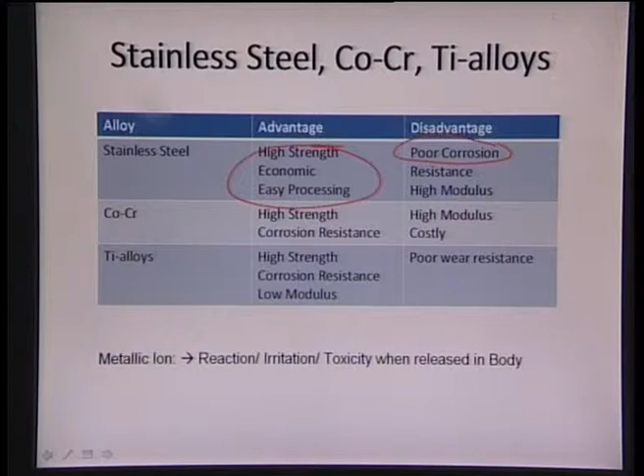So that's the reason we went on to the cobalt chromium alloys, and there we realized that it has very good strength and high corrosion resistance, but the problem is it is very costly and still has a very high modulus. If a material has very high modulus, then essentially the bone will start thinking, I don't need to be here, and then it will start getting reabsorbed into the body. So that is the reason we want to come back to a material which has a somewhat lower modulus, and that is being satisfied by titanium alloys. They provide a good combination of high strength, good corrosion resistance, and low modulus.

But the only problem with titanium alloys is that they have very poor wear resistance. So to counteract the poor wear resistance, titanium alloys generally need to be supplied with some sort of surface coating. Surface coatings take care of the wear part, so they enhance the surface wear resistance of the titanium implant. At the same time, we can also apply a coating which is much more biocompatible in nature, and which can assist bone integration onto its surface.

That coating can be more ceramic in nature, such as hydroxyapatite. Once the hydroxyapatite-based ceramic coating is applied onto the titanium implant, it can take care of the lower wear resistance of titanium, and it can impart much superior wear properties. Also, it can provide a base for cells to grow, adhere and proliferate on the implant surface.

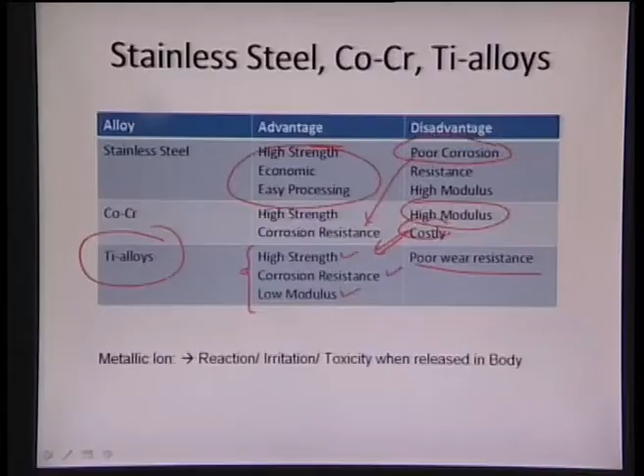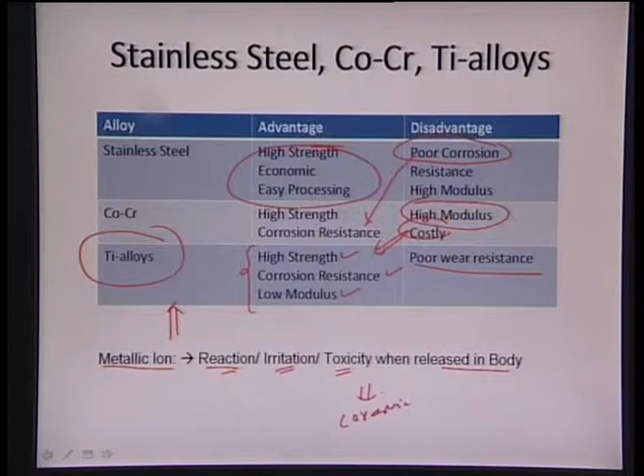There is one more problem with the titanium alloy titanium 6 aluminum 4 vanadium: it has a metallic ion concentration, and that can react, irritate, or induce some toxicity when it is released into the body. So in order to eliminate or reduce the effects of this ion release into the body, ceramic coatings can again come to the rescue. Ceramic coatings act as a barrier, and they don't allow the ions to flow easily from the implant surface into the surrounding body.

The two very common titanium alloys which are predominant in the medical industry are commercially pure titanium, which is approximately 99% to 99.5% plus purity, and which has been widely utilized in the biomedical industry, as well as a combination of titanium with 6% aluminum and 4% vanadium. It is also called Ti6Al4V, or Ti6-4 for ease of use. These are the two very commonly used titanium alloys in the biomedical industry.

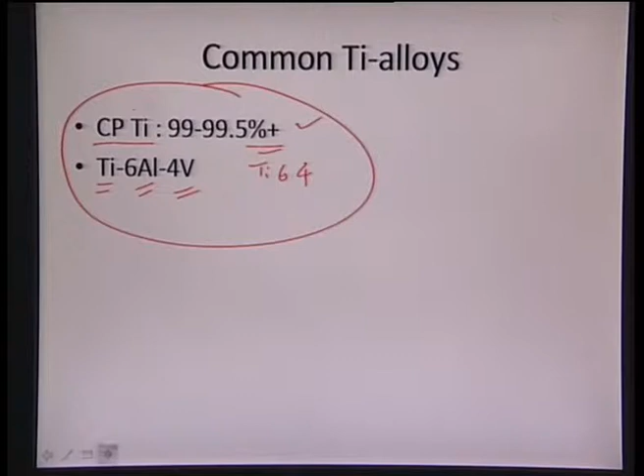Coming to the microstructure, pure titanium is basically HCP, hexagonal close-packed, and the phase is called the alpha phase. So pure titanium is more of a single phase material, and it is HCP. Owing to the limited slip planes which are available in an HCP crystal, it has very limited processability. That is generally very difficult to process as such.

Again, this particular titanium alloy is generally cold worked to achieve grains on the order of 10 to 150 micrometers in size. Ideally, we can get a single phase structure in the titanium alloy, and to induce much more strengthening, we go with cold working. Approximately 30% cold working is given to the titanium alloy in order to achieve grains on the order of 10 to 150 micrometers in diameter.

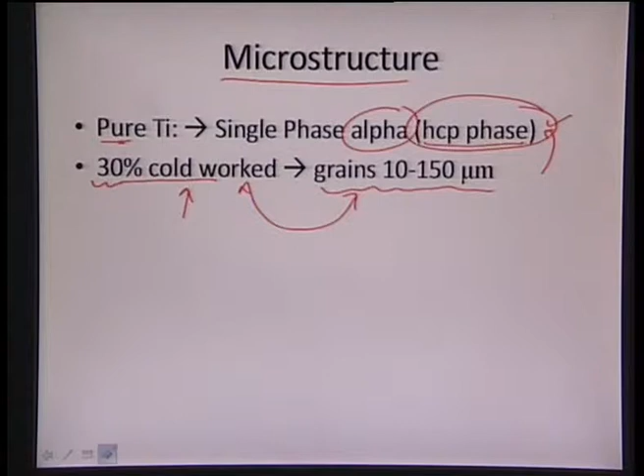There can be addition of secondary interstitials into the titanium, and those can be either oxygen, nitrogen, or carbon. They go into the interstitial sites of the titanium, and from that we can have various combinations. There are certain grades which differentiate the titanium alloy, going from grade 1, grade 2, grade 3, grade 4, depending on the oxygen content. Oxygen can be from 0.1 to 0.4 weight%. Nitrogen can be approximately 0.05 weight% maximum, and carbon can be up to 0.10 weight% in the titanium alloy.

Basically, the function of all these interstitials is so that we can achieve interstitial solid solution strengthening. Once the carbon, oxygen or nitrogen are in the interstitial sites, they induce solid solution strengthening of the titanium alloy.

And it has also been observed by researchers that nitrogen shows approximately double the effect of either oxygen or carbon. So if we have nitrogen sitting in the interstitial, it will provide much more strengthening effect in comparison to that of our oxygen and carbon. But at the same time, we can add maximum nitrogen of around 0.05 weight%.

So this is the overall effect of the interstitial: oxygen, carbon and nitrogen go and sit in the interstitial sites, and nitrogen shows approximately double the effect of oxygen or carbon to provide strengthening, or the solid solution strengthening, interstitial solid solution strengthening.

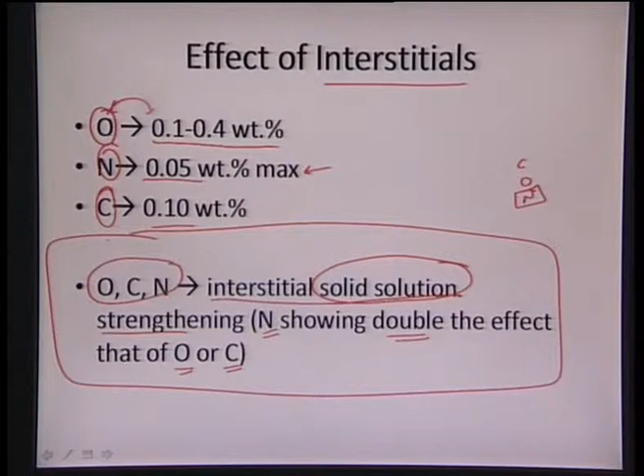And oxygen is also very predominant in terms of enhancing the mechanical properties. Like if we increase the oxygen content from 0.18 to 0.4%, the yield strength will increase dramatically from 170 to 485 MPa. So approximately more than 2.5 times improvement it can show in the yield strength just by doubling the oxygen content. So that is the approximate dependence on oxygen content in the interstitial.

So once we have titanium, if we start inducing oxygen to a larger percentage, it will enhance the yield strength. At the same time, if we increase the oxygen content from 0.085 to around 0.27 weight%, we will also see an increase in the fatigue strength. So we see that fatigue strength is increasing approximately from 88 to 216. So if we increase the oxygen content approximately double or triple, the same type of effect we can see in the fatigue strength as well.

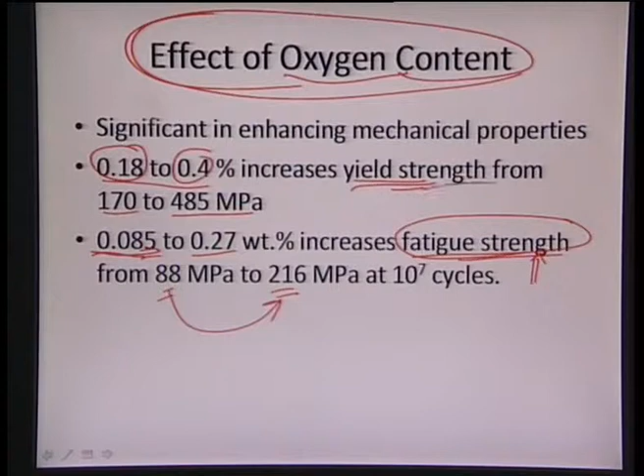So we can realize that higher oxygen content is much more useful in terms of increasing the yield strength, and at the same time increasing the fatigue strength, because those sites act as some high energy regimes, and it becomes difficult for the slip to occur, and that basically provides an increase in the yield strength or the fatigue strength of the particular titanium alloy.

And the corrosion resistance comes in the titanium alloy because of the presence of this titanium oxide layer. So the titanium oxide layer acts as a barrier for the surface to interact with the titanium implant, and this titanium oxide is responsible for rendering the corrosion resistance to the tissue level. Because of its similarity, it can allow the cells or tissues to grow on its surface without inducing any toxic effects. So that biological compatibility is available even at molecular scale or even at the tissue level, so that tissues find a very friendly environment on the titanium oxide surface, because it is no more titanium.

Titanium is basically covered with an impervious layer of titanium oxide. So there is no release of titanium ions through this particular titanium oxide, and the titanium oxide is much more bio-friendly. It's very bio-inert in nature, and that does not induce some irritation or toxicity effects into the cells or tissues. So cells and tissues find a very comfortable environment in terms of their adhesion, in terms of their growth, in terms of their proliferation.

So that is the advantage we achieve from the titanium oxide layer, that it imparts much corrosion resistance even in the very severe body fluid environments, and again it can also impart much biological compatibility both at molecular level as well as the tissue level. And also researchers Kasemo and Lausmaa found that titanium oxide assists osseointegration, in oral and maxillofacial implants. So that is also what has been observed, that titanium oxide is much more bio-friendly in nature, and it allows osseointegration in oral and also maxillofacial implants.

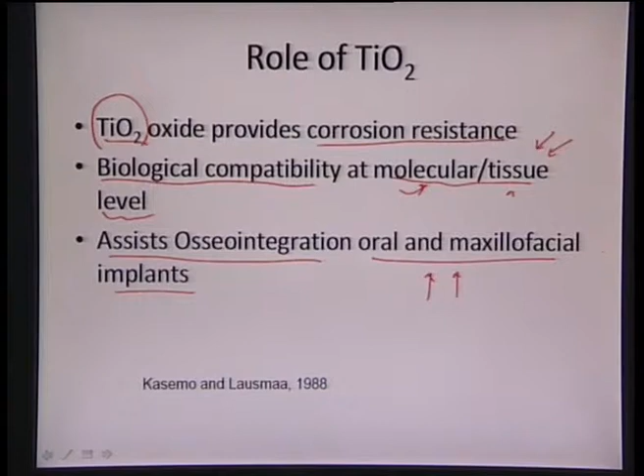Coming to the titanium alloy, generally titanium itself is not that strong in nature, so it also needs certain reinforcement, because titanium is a single phase material, and if we start making it a dual phase material, so instead of having only alpha or the HCP phase, if we start inducing the secondary phase, we can also get strengthening from the secondary precipitate. Why? Because it will also impart an impediment to the dislocation motion. It can also generate some new slip systems which can be available for the slip to occur. So in that particular manner, it will enhance its ductility. So the processing part is basically enhanced. At the same time, the strength part can also get enhanced because of the dual phase microstructure.

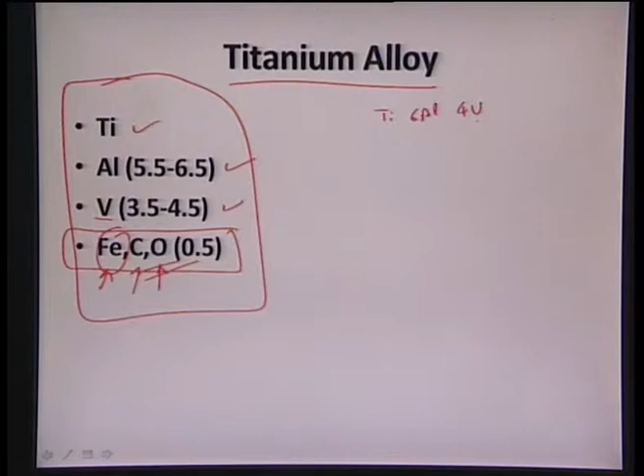So in the titanium alloy, we have the base as titanium, and generally this is called titanium 6 aluminum 4 vanadium. So we generally see aluminum between 5.5 to 6.5, vanadium between 3.5 to 4.5, and we have some secondary reinforcements as well, that can be iron, carbon, oxygen, and they also impart strengthening in terms of increasing either the yield strength or the fatigue strength. So that part can also be achieved from the interstitials such as carbon and oxygen. And we can also have some other reinforcements such as iron, nickel and so on. But overall, this titanium alloy is also called titanium 6 aluminum 4 vanadium. It is a very popular material as a biomedical implant material, and it consists of aluminum around 6% and vanadium around 4%, and the rest is around carbon, oxygen and so on.

Again, as I said earlier, the role of additions: they go on to titanium 6 aluminum 4 vanadium. It forms a dual phase microstructure. So alpha comes basically from the titanium part. At the same time, alpha is also being stabilized by aluminum. So aluminum also acts as an alpha stabilizer. It renders the HCP phase much more stable. But the presence of vanadium helps in forming a beta phase. So we see this titanium 6 aluminum 4 vanadium is a combination of alpha plus beta phase.

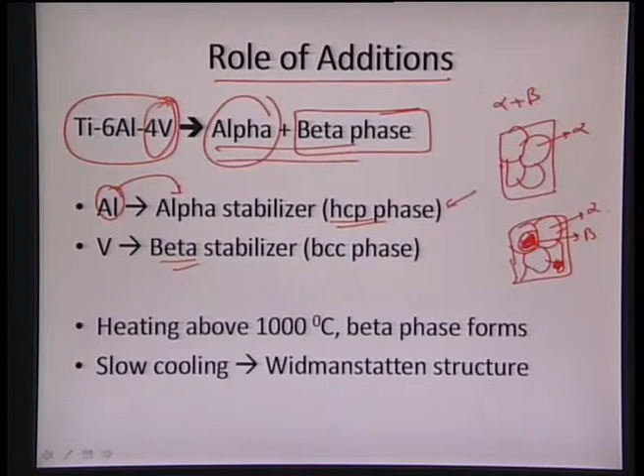So now instead of having a single phase, like in the case of titanium, where we had only a single phase, which was nothing but alpha, in this case we have a dual microstructure. We are seeing a kind of dual microstructure out here, and some certain pockets are only beta. So we can see this alpha plus beta. This is beta and this is again alpha. So we see a dual phase microstructure which basically assists us in achieving even higher strengths and very high fatigue strength.

So that is the advantage of inducing secondary alloying additions such as aluminum and vanadium, to impart much more increase in the yield strength and the fatigue strength of a titanium alloy itself. And one more thing which happens with titanium 6 aluminum 4 vanadium is that once we heat it above 1000 degrees centigrade, we will see the formation of beta phase, because beta phase is stable at higher temperature. So once we go above 1000 degrees centigrade, we will see a microstructure which is full of beta. So we'll see a 100% beta structure which forms once we heat this particular material above 1000 degrees centigrade,

and once we start cooling it very slowly, the material is basically being retained at very high temperature for a very long time, and it cools down very slowly. So there is a much greater increase in the grain size. That is the problem with slower cooling, that we tend to see something called Widmanstätten structure. So in the Widmanstätten structure, we basically have a structure like this. I'll just draw it here.

We see a structure in which initially we will have only beta grains once it is heated at higher temperature. So in this case, we have greater than 1000 degrees centigrade. We see completely 100% beta, and as soon as we start cooling it down slowly, we'll see an increase in the grain size. So we'll observe increased grain size, and after a certain temperature below 1000 degrees centigrade, we'll see the nucleation of alpha phase as well. So in this particular case, we'll see bigger beta grains which were stable at more than 1000 degrees centigrade, and we see nucleation of alpha phase.

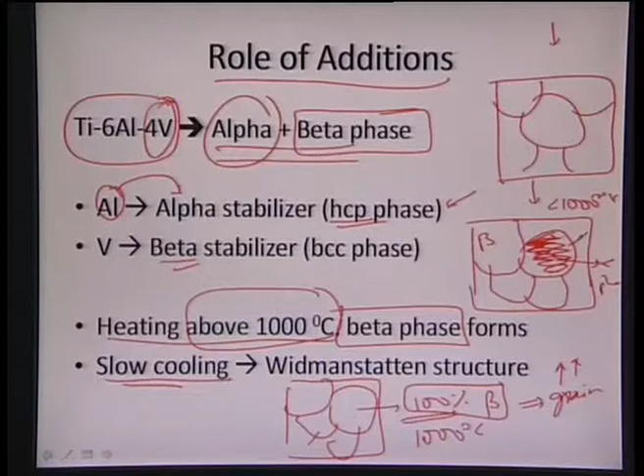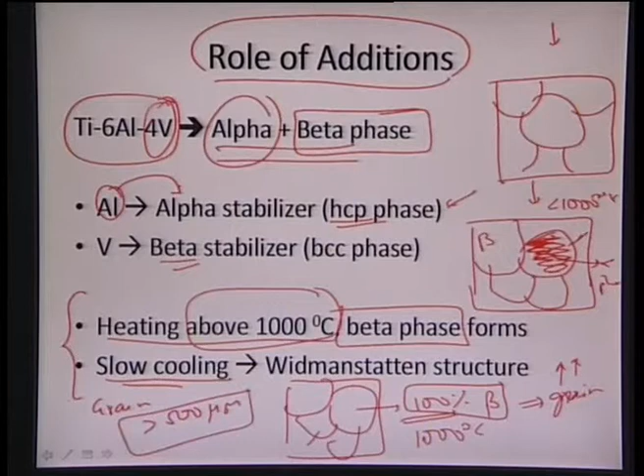Though it has certain advantages in terms of its additions, this slow cooling is inducing some deleterious effects in this particular material, and the grain sizes can basically be more than even 500 microns. At this particular grain size, the mechanical properties will be very inferior because of the Hall-Petch relationship, because our grain sizes are of the order of more than 500 microns. So the overall mechanical properties, such as yield strength, will be very inferior.

So that is the overall negativity which can be induced just by processing itself, because in this case we are taking the material at very high temperature, more than 1000 degrees centigrade. We are letting the beta stabilize, and then we are allowing the alpha phase to form in equilibrium. So we are doing a very slow cooling, and because of that the grain size has extended to a very huge extent. Maybe they have gone up to more than 500 microns, and then this particular nucleation will cause the HCP phase to form, which is nothing but alpha, which is more like a needle-like structure, and that is inducing this negative effect.

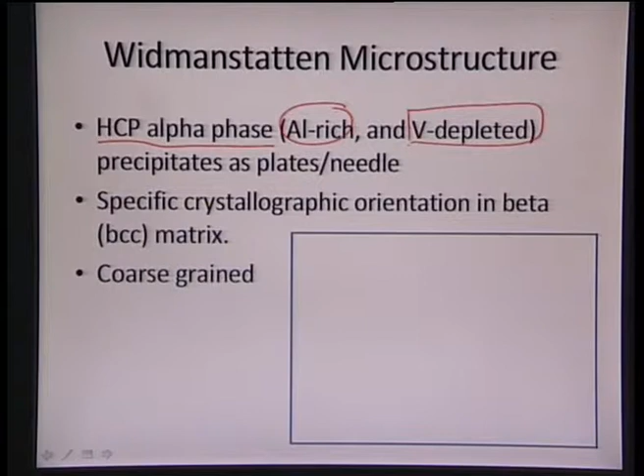So we can see this Widmanstätten structure. It is basically the HCP alpha phase, which is aluminum rich, and when depleted in the vanadium part, it starts precipitating as a plate or needle. So we see that we had grains like this for the beta, and then in that we see the nucleation of this alpha phase, which can start nucleating within like this, and then we have this beta phase, and then again we will see alpha phase nucleating, because alpha phase will be much more stable at less than 1000 degrees centigrade. We will see more of the grains which are forming alpha now.

So we will have much more regions which have started forming alpha, and then the original beta regions which were present because we had taken the particular material above 1000 degrees centigrade. So this is the initial beta, and then we start seeing the formation of alpha structure, which is much more needle-like, and that induces specific crystallographic orientation in beta. So this alpha is forming by precipitating in particular crystallographic orientation. So that is the reason it comes more like a needle-like structure, and that is again forming within the beta grain. So we have alpha getting precipitated in certain directions of the beta phase.

So that's what is being observed out here, and it is again a coarse-grained material because the material has been staying for the whole heat treatment for a couple of hours. So that is the problem with this particular material. We are taking it to very high temperature, we are letting it be there for much time, and then we are doing a very slow cooling. That is the reason the material undergoes a higher thermal exposure for a very long time, and that is the reason the grains remain very coarse.

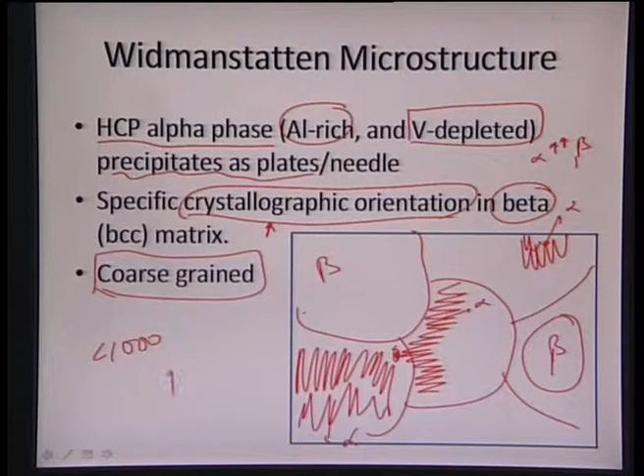So to avoid that, what can be done? We can do a rapid cooling, and rapid cooling basically induces martensitic or bainitic-type solid state transformation, and since we have very rapid cooling, we can also achieve very fine microstructure. So that is the advantage with rapid cooling, that instead of a very coarse Widmanstätten structure, we are seeing a martensitic or bainitic-type solid state transformation. At the same time we are able to achieve very fine microstructure.

So we are not staying at the high temperature regime for a very long time. So temperature is not high anymore. We are doing a very rapid cooling. So we go to in excess of 1000 degrees centigrade, but we cool the material very rapidly, and that rapid cooling induces martensitic or bainitic-type solid state transformation, and again rapid cooling also induces very fine microstructure. And again the alloy is heated or cooled below the beta transition. So we are not letting this particular material go above 1000 degrees centigrade. So we are letting this transition happen below 1000 degrees centigrade. So we are heating the material to less than 1000 degrees centigrade. So we don't allow the beta to form completely.

So once beta is not formed completely, rapid cooling can induce martensitic or bainitic-type transformation, and at the same time we are not allowing the grains to get coarsened. So grains remain fine and they are retained as such. So we are not letting the grains get coarsened because we are basically heating them much below 1000 degrees centigrade, and then they are basically annealed to give a very fine microstructure. In this particular case, we have isolated beta in alpha matrix. So that is what is happening now. We are not letting the beta form to a large extent.

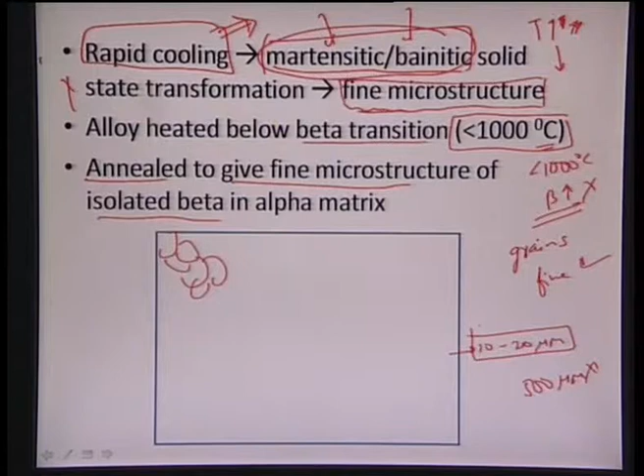So we see very fine grains which can form, and these fine grains are of the order of around 10 to 20 microns. So instead of going up to more than 500 microns, they are no more than 500 micrometers in diameter. They remain in the 10 to 20 micrometer regime. And once we have this fine alpha regime, so we have alpha grains, and we see that the beta is forming within it. So we will see some beta forming here and there, but it is again scattered. It is again very fine.

Fine, it means it is of the order of maybe 1 to 5 microns or so. So this alpha is very fine because the grains themselves are around 10 to 20 micrometers. So the beta, which is basically getting nucleated at high temperature, is again very fine, and it is scattered throughout. So we see a very homogeneous structure. Homogeneous, again a very fine or very refined structure, and grains are of the order of 10 to 20 micrometers in diameter.

So these are certain advantages that we are getting from here, that we are letting the material heat, but not above 1000 degrees centigrade. We keep the material lower than 1000 degrees centigrade, and then we do annealing or rapid cooling. And rapid cooling is basically retaining those fine alpha grains, and we see some precipitation of the beta grains within the alpha grains. So we have alpha grains now in the order of 10 to 20 micrometers, and then beta is getting precipitated here and there, and again the size of beta precipitated is a couple of microns.

So overall what we get is a very uniform structure, a very nicely dispersed beta in the alpha matrix, and now we don't have any segregation or Widmanstätten structure anymore, and the grains themselves have now a limited size of around 10 to 20 micrometers. So overall properties grow multifold because of the absence of these negative structures, such as the Widmanstätten structure or the coarse grain. So the fine grained materials also now induce this Hall-Petch relationship. Because of the Hall-Petch relationship, we can get much superior mechanical properties, which are stated in the earlier lecture.

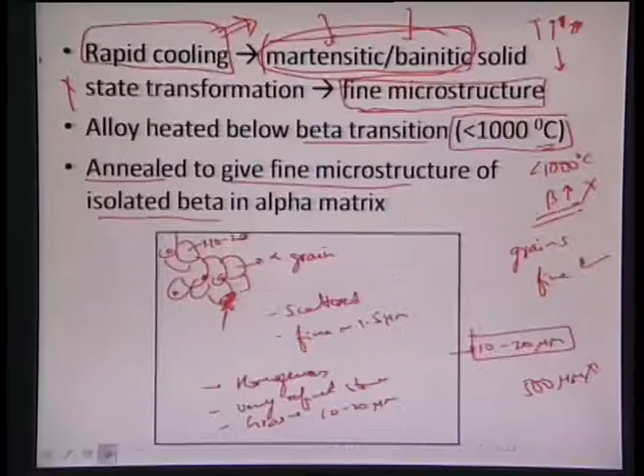But one thing that is basically seen is that in titanium alloys, the Young's modulus doesn't change much even with certain additions, and for commercially pure titanium, which is cold worked to around 30%, we see a yield strength of the order of around 485, tensile strength of around 760 MPa, and a fatigue endurance limit of around 300. But as soon as we start adding certain alloying elements to it, like in the case of titanium 6 aluminum 4 vanadium, and that material is forged, annealed, and heat treated, we can see that once it is annealed, the yield strength increases up to around 900 megapascals, tensile strength of around 1000 MPa, and fatigue strength is almost doubled.

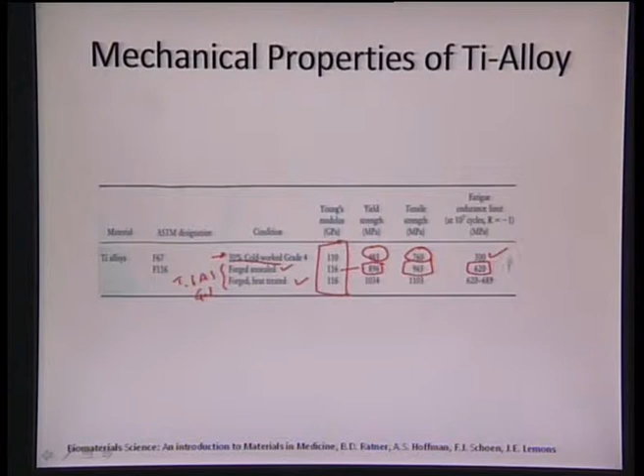So at 10 to the power 7 cycles. Again, controlled heat treating can increase its yield strength to around 1034 megapascals, which is more than a gigapascal. Tensile strength is also increased to a certain extent, around 1.1 gigapascals, and fatigue strength is also increased to a certain extent. So we can see how the role of heat treatment can be utilized in the processing of titanium alloy to achieve enhanced mechanical properties. So that is what it is. Like titanium alloy, we are seeing certain properties.

Once we add 6 aluminum 4 vanadium, we see a dual phase microstructure, and that dual phase microstructure is basically assisting in the increase of yield strength, which is almost 2 times. And then again controlled heat treatment can increase the yield strength by a further factor, and again the fatigue endurance limit can also be increased by around 2 times. So that is the way in which we can manipulate the properties of titanium alloy via certain secondary additions, as well as by utilizing heat treatment of the titanium alloy.

So those are the advantages of utilizing titanium alloy and performing the heat treatment, because we can achieve very superior yield strength, tensile strength and fatigue strength. Though the Young's modulus remains approximately the same, it does not change much, the enhancement in yield strength, tensile strength, and fatigue strength is just phenomenal.

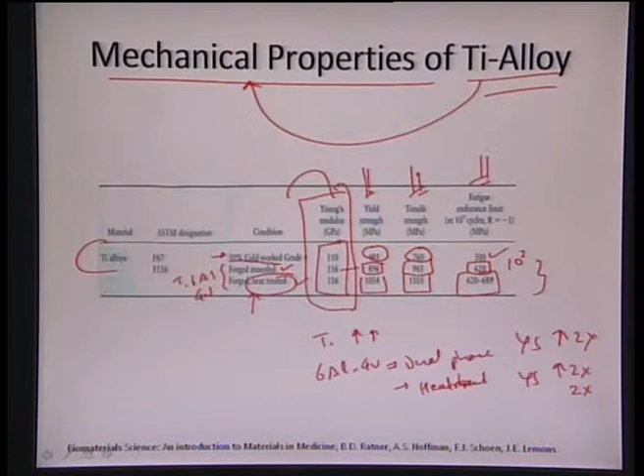Again, titanium alloy, as we learnt earlier, has very poor wear resistance. At the same time, if we want a very superior fatigue property, it is basically more of the implant which takes the load and undergoes much more wear and tear in terms of taking the impact, in terms of taking the fatigue. Because ceramics are very brittle in nature, they cannot take much of the load or the fatigue. They don't have good fatigue property because they don't have enough yielding which can happen in the material. So we see that the fatigue property is much more dependent on the titanium alloy.

So that part we can see that fatigue property is more dependent on the implant, or the titanium alloy which forms the implant, and to improve the fatigue property, it is only the titanium alloy which is responsible here. So we need to perform certain heat treatments, as we saw earlier, a controlled heat treatment. We have to take the material below 1000 degrees centigrade and do the heat treatment. So the yield strength and the fatigue strength increase to a large extent in comparison to the titanium itself.

So if you are utilizing commercially pure titanium, it might have a fatigue strength of around 300 megapascals at 10 power 7 cycles. But if you take a titanium alloy and properly heat treat it, it can have up to 600, 700 MPa for the same life cycles. So that essentially tells us that we have to utilize a superior grade of titanium if we want to achieve very high, or enhanced, fatigue properties, and because that is mostly dependent on the implant, because the implant is the one which has to take the overall load.

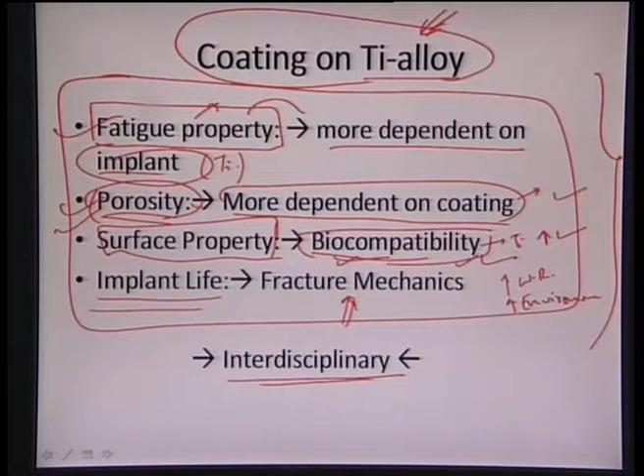Then coming on to the compatibility part of whether it is viable in terms of whether cells can really cling on to it or not, or seeing about its biocompatibility, and seeing about the mechanical part, whether the fracture will occur prolonged or it will come very shortly. So those parts make this particular study interdisciplinary in nature, and that's what makes it much more complicated.

And now coming to the wear of implants. Seeing that it is multidisciplinary in nature, wear is also one of the very essential components of designing an implant, because any two joints which are lying nearby will tend to wear out with time. If there is some movement between the two, obviously the material will undergo some sort of wear. Like we have acetabular cups and a ball and socket joint. In that we can see an overlay between a metallic surface and a polymeric or a ceramic surface. So once we have two dissimilar materials close to one another, definitely there will be some wear at the particular interface.

Again, wear of metallic implants is one of the very serious concerns, because once it starts releasing debris while it is getting abraded or worn out, those ions will start getting released into the body. And this wear will occur at the different joints of the human body. Once it is implanted into the body, there is hardly any control. All the debris which is generated tries to accumulate somewhere, or is just released into the blood, and that's it. We don't have any control after that. So we need a material which has very superior wear resistance once it is implanted into the body. Wherever two similar or dissimilar metals come in contact, we need to design it so nicely that we can increase the corrosion resistance and enhance the wear resistance of those particular implants.

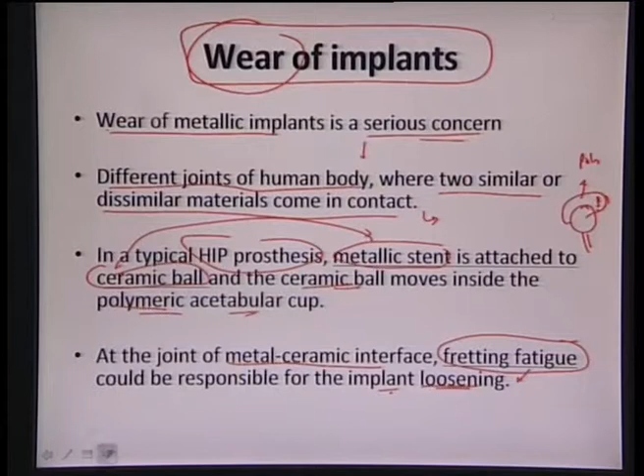And coming back to one more important property of titanium alloys, its corrosion resistance. Corrosion of titanium alloys is also one of the very critical parts, because generally we utilize titanium alloy, which tends to be corrosion resistant because of the formation of a TiO2 layer on its surface. There is a group of Spriano which has characterized samples of titanium 6 aluminum 7 niobium alloy, with surfaces presented to different chemical and mechanical states, and they found that titanium 6 aluminum 7 niobium presents a bioactive ability and good corrosion resistance only after an appropriate surface treatment.

So only when surface treatment is given properly do we get improved corrosion resistance, a good biocompatible surface, and enough porosity on the surface, along with proper wear resistance and corrosion resistance and better biocompatibility, so that it can take care of the overall aspect of its compatibility as an implant. It basically consists of two steps: first chemical etching and then heat treatment. So it needs some chemical treatment plus some heat treatment, so that it can attain superior yield strength and superior tensile strength.

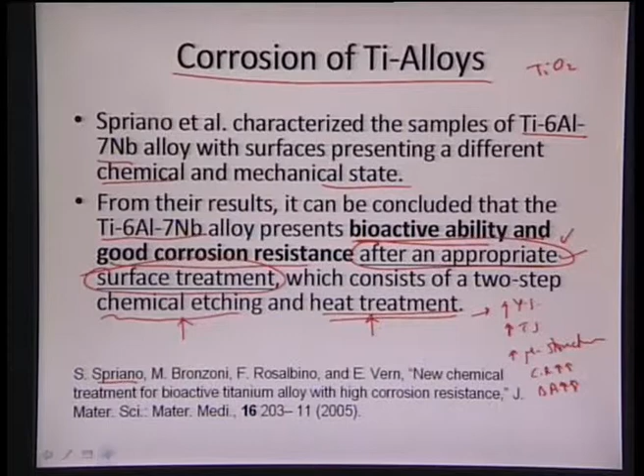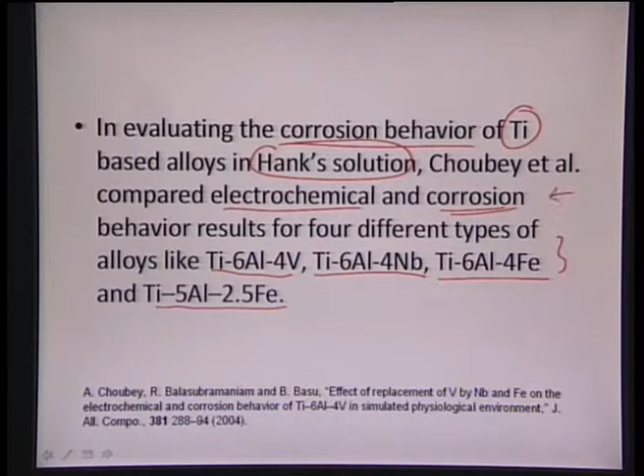There is one more group, Choubey, which studied the corrosion behavior of titanium based alloys. They took a couple of alloys such as titanium 6 aluminum 4 vanadium, titanium 6 aluminum 4 niobium, titanium 6 aluminum 4 Fe, and titanium 5 aluminum 2.5 Fe. They took four different types of alloys and found their behavior in Hanks solution, comparing the electrochemical and corrosion behavior of all these alloys under different conditions.

At the same time, they also performed fretting wear tests of the titanium based alloys. Fretting wear was done using a 10 Newton load at 10 hertz, for a displacement distance of around 80 microns, going up to around 10,000 cycles, all under simulated body fluid environment. They found that the coefficient of friction for titanium 6 aluminum 4 vanadium lies between 0.46 to 0.5, whereas that of 5 aluminum 2.5 Fe falls within around 0.3. They found the major wear mechanism was tribomechanical abrasion, transfer layer formation, and finally cracking — three steps in total.

It also showed that the coefficient of friction is very high for commercially pure titanium, around 0.5, whereas it decreases marginally in titanium 6 aluminum 4 vanadium, showing a variance from 0.46 to around 0.5. Titanium 13 niobium 13 zirconium showed around 0.48, titanium 5 aluminum 2.5 Fe showed around 0.3, and cobalt 28 chromium 6 molybdenum showed around 0.4 coefficient of friction.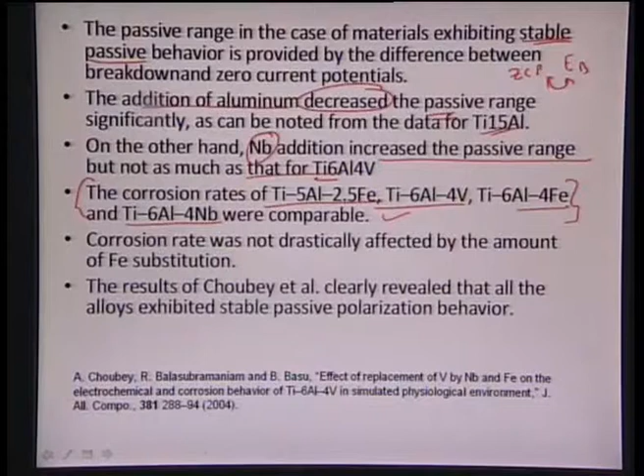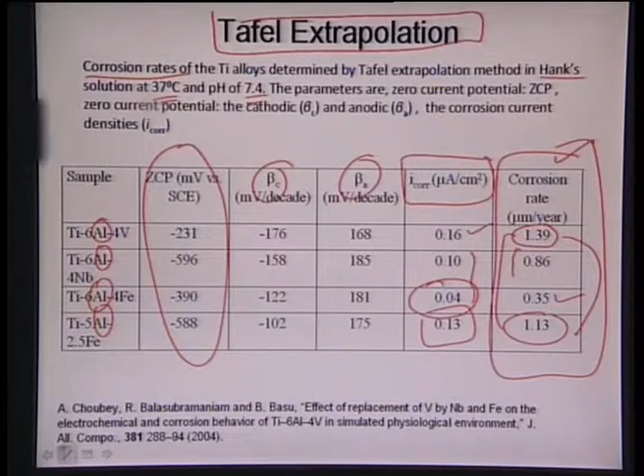So overall, we see that the corrosion rates are not so different for all these materials, even when we are adding certain iron to it, and they also clearly reveal that the stable passive polarization behavior is present between zero current potential as well as the breakdown potential.

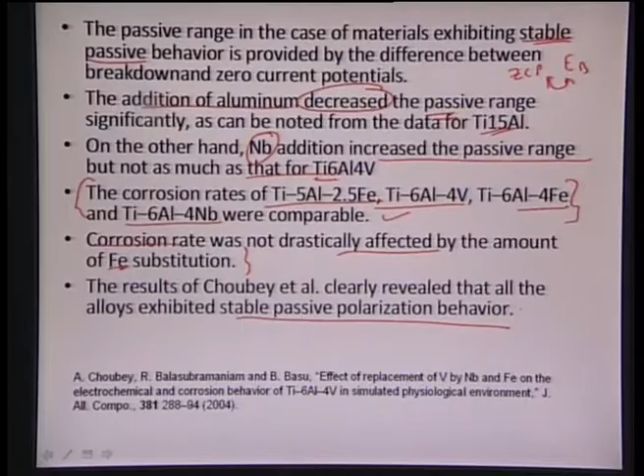So coming back to the titanium alloy, the overall gist of it: titanium alloys are mostly HCP in nature, and then we tend to add alloying elements such as aluminum, which is an HCP or alpha phase stabilizer, and then we add vanadium, which is a beta phase stabilizer or BCC stabilizer. So there are two ways we can synthesize this particular material.

We can heat it above 1000 degrees centigrade and let the material cool slowly, but that tends to form very huge grains, or they tend to precipitate alpha in the beta grains, and beta grains are very coarse in nature, and from that we can get a Widmanstätten structure. But since the grains have grown to a large extent, as well as we are getting a very needle-like structure, this overall microstructure doesn't appear good, and it generally shows a very poor strength.

So to avoid that, we take the material to less than 1000 degrees centigrade and let the alpha dominate in this regime, and then we see certain nucleation of beta precipitate, which is again BCC in nature. So we see a very fine grained structure with very nicely dispersed beta in that. That gives a two-phase microstructure, very fine, 10 to 20 microns with beta of around 1 to 5 microns in size. That gives a very uniformly dispersed microstructure, and that is superior in its mechanical properties in terms of yield strength and fatigue strength.

So what we can see is that heat treatment is a very essential or key component in terms of altering the mechanical properties. We can increase the fatigue strength by approximately 2 times once we do a controlled heat treatment to the particular material.